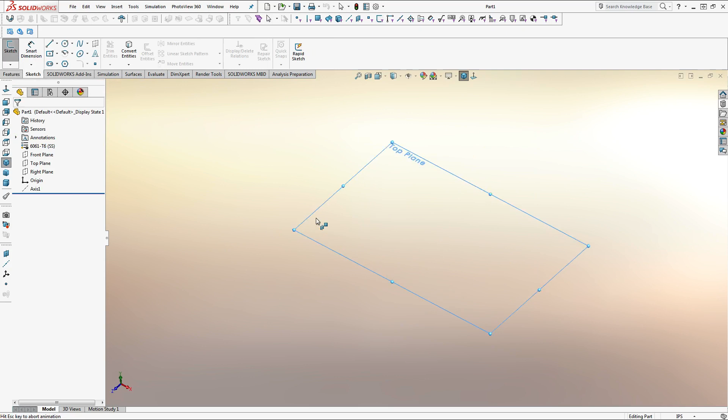So I'm going to start off by doing a layout sketch of my drivetrain. Before I even make any parts, usually I do a sketch of basically what it's going to look like, what the constraints are. My drivetrain has to fit in a 30 by 30 area, so 30 inch by 30 inch. So I usually start off by defining my area with a bounded box of construction geometry. Think of this like a top-down view, so to speak.

And then I'm going to have my 2x1 rails, it's going to be 1 inch wide. I'm going to make this center point vertical. And this can actually touch the 30-inch edge. I'm actually going to say it's going to extend the entire width. So this is my piece of 2x1 tubing, my front one. And I'm just going to real quick make my horizontal and vertical center lines so I can mirror across, just so I can be lazy. Nice. So I have my front rail, my back rail.

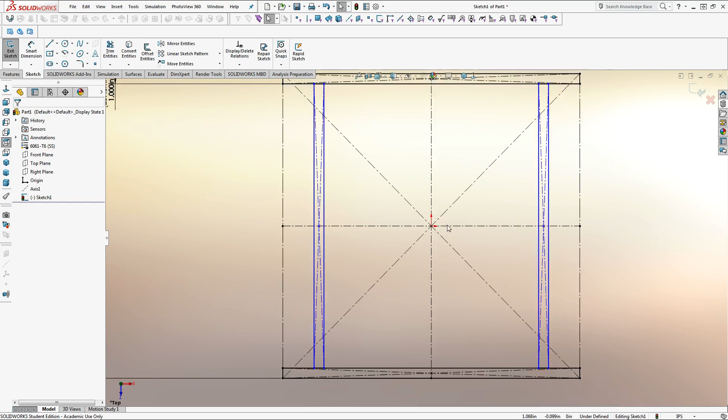Now I'm going to do my drive rails. Select that piece in there, which is the width, so I can have my 2x1 be actually 1 inch wide. I'm going to take that and mirror it across. Now how wide I want it to be really doesn't matter right now. For me, nominally, let's just say 2-inch wheel wells. I have 2 inches for my bearing block and for my wheels. We'll get into specifics about that later. I'm just gonna put that dimension up there.

So let's look at what I have space-wise. I'm planning to have my gearbox somewhere in the middle. I'm going to simulate my gearbox space by this rectangle, pretending it's a top-down view. This is the approximate rectangle bounding my gearbox. I don't know what size it's going to be, I haven't made it yet. But I know I'm going to use 2 CIMs pretty close to each other. A CIM is about 2.54 inches in diameter, so double that, 5.08. I'll round up to the nearest half inch and overestimate: about 5.5 inches wide. Typically a good estimate for the drive.

It's going to be a single speed gearbox using a single stage. So I have 2 1/4-inch plates and then a gear stage that takes roughly about 1/2 inch. So that's 1 inch, and CIMs are like 5.5 inches long. So I'm going to say this is like 6 inches long. Just a rough estimate. And of course, I don't expect y'all to know these numbers off the top of your head. But in time, you'll figure them out.

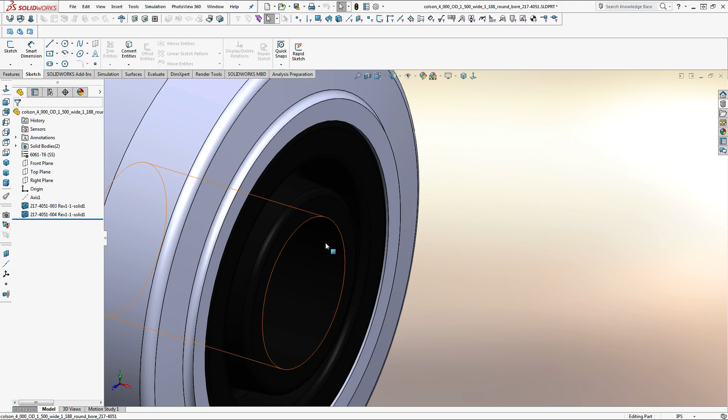Let's see. There's a round bore one, like this, and there's a hex bore. The round bore was what teams used before VEXpro came out with the hex bore ones. At this point, there's no reason not to use the hex bore one. Oh, here it is, the hex bore one. And real quickly, because it's bothering me, I'm going to change that color to something I can actually see.

When I was younger, I made everything dark black because that's how it looks in real life, and then I realized you can't actually see it in the CAD that way. So I settled with a little less color accuracy in CAD so I can see it better. So this wheel, the approximate width, it says down here 1.689. So I'll run with that.

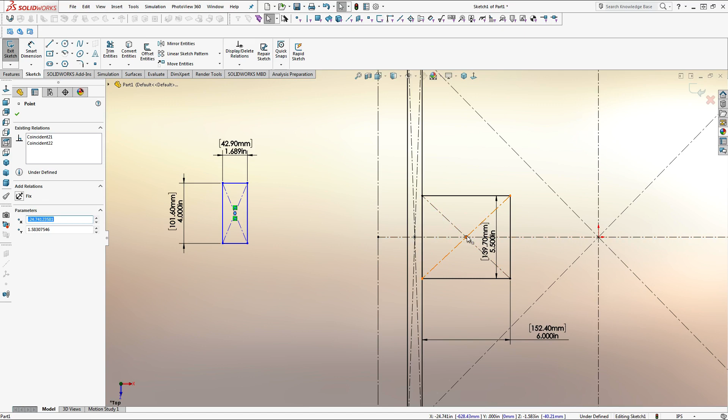And then it's going to be the same dimension as my gearbox, right down the center. Let's see. So it's not going to be directly on the tubing though, because I have that bearing block that we'll get into later. That goes to an 1/8 inch thick, and then I'm going to have a 1/16 inch spacer in there. So that's 1/8 inch plus 1/16. So yeah, I have a nice little bit of wiggle room.

What's this? A little less than like 0.25. Or is that quarter or 0.25? That's quarter. Yeah. Works for me. So I'll do that. And then I'll simulate my other two wheels. I can just use the equal relation because all my wheels are going to be the same size. And I'll say that's a vertical to that one.

Now let's see. I want my wheel to be kind of far, but not too far. I also want it to be an approximate multiple of 0.25, just because it makes certain things easier. So let's see, this is currently how far? 11.638. Can I do 11.75? Yeah. How much wiggle room does this give me?

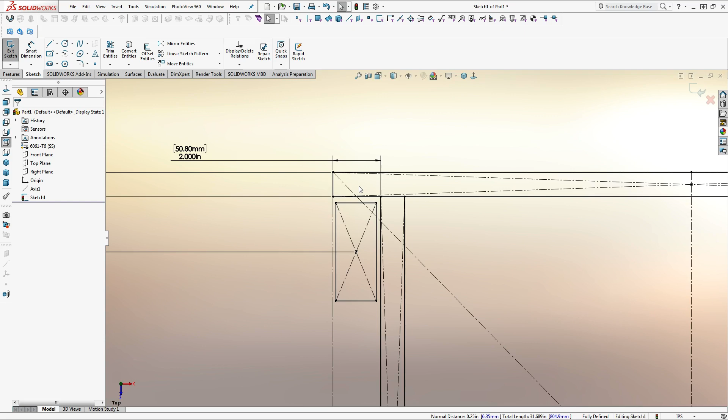Quarter. Yeah. I want to be able to move it up and down by like, oh, well, no, okay, yeah. Actually, that works. Because the bearing block is going to have 3/8 inch of total movement, which means 3/16 in each direction. So 3/16 is less than a quarter. This is nice. Okay. So I'll just put that there.

And let's see, I'll just mirror that across so I can have my wheel side, and then I'll do the same thing. Oops. I don't want to get the tube. I'll just get the wheel separately, and then I'll get the gearbox. Just real simple. Did not get that wheel. Or that one. What's up with that? Alright, I think that looks good. Just mirror that over. Nice.

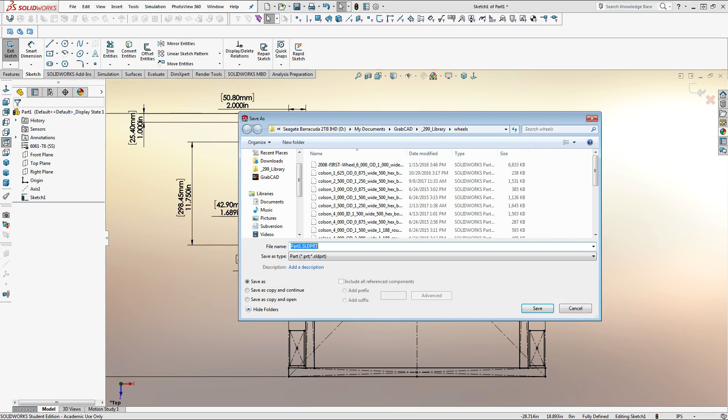So it's a pretty simple diagram of what my drivetrain is going to be like. And it's nice that we get all this done in the sketch, because we can always refer back to this for dimensions and such later. So I'm going to save this. When I go to my project folders, before I even have my different subassembly folders, I have a few underscores. I just put underscores in front because it moves the folder to the top. And I'll have like sketches or DXFs, different non-subassembly specific folders.

So this is the drivetrain, this is the main sketch. I still use the naming convention most of the time. And instead of a subassembly number, I'll put sketch and which sketch it is. Most of the time I just have a single sketch in its main. Sometimes I'll have a sketch for different subassemblies if it's a larger robot. Either way, get that saved so we can always refer to it later. We'll get started with making parts.

Looks like this is made up of 4 pieces of tube, 2 pieces of 30-inch, and 2 pieces of 28-inch. Cool. So I'm going to start with the front and back ones because they're super simple. We'll extrude on the right plane. I use, by force of habit, the right plane. You don't really have to, but I like doing so. For my front and back tubes, I'll use a 1/16 inch wall because they're not taking as much load from the drivetrain as the left and right rails are. I also use the term rail to refer to the tube. It's interchangeable.

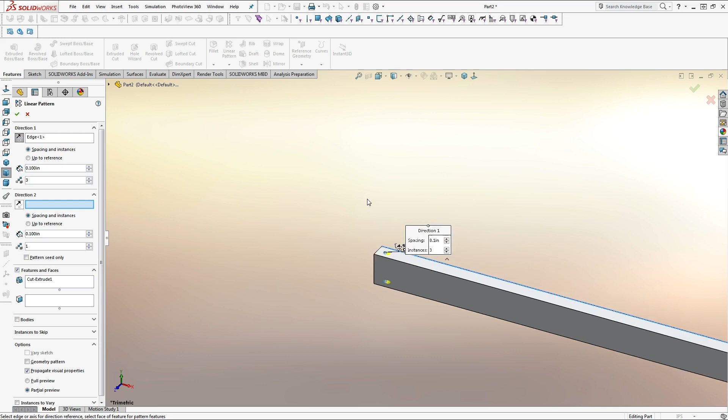Oops, don't want to fill it. Going to the features, I go to a linear pattern, select any side length, as long as it gives me the direction I want. I can tell because the arrow's out there. And over here on the side where it says spacing and instances, I'm going to actually choose up to reference. What this will allow me to do is I will select the edge, my offset distance. I just click the up arrow to 0.1, doesn't matter what it is, but 0.1's good. And I'll say my distance between instances is 0.5. The nice thing is it just does it all for me.

Now, as an alternative, what I used to do, I used to use spacing and instances, and I would count each individual instance. The problem with that though is this one's 59, but if I wanted to change this length, if I want to make it 32, I still only have 59 holes. Whereas, I'll change that back to 30.

If I do up to reference, my reference point is the end of the tube, and I'm always referencing off that position. I don't give it an exact number. I can go and say 36, why not? And you'll see it'll just fill in the extra gap for the holes. So that's an easy thing to do. It's a nice little touch. So really for this part, for the front and back, this is it. That's all I really need for this rail.

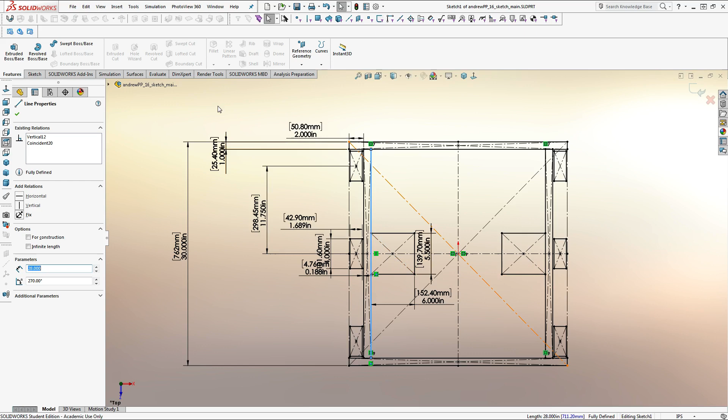So I'm going to make a new folder, and it's going to be Andrew Personal Project 16 01. Let's call it the frame. I'll save this in here as Andrew PP 16 0101. So the first part in subassembly number 1. Cool. And then what was the size again? Go back to my layout sketch. My left and right drive rails are 28 inches. Good to know.

So I'll start with doing the exact same thing for the most part. Use my center rectangle. I have a 2x1 rectangle. Use 0.125 as my offset. So what I'll suggest for all y'all is for your front and back tubes, you can make them 1/16 wall, thinner, not always as strong, but it's definitely lighter. But for the inside, where you have your drive tubes and your gearbox and your bearing blocks, you're going to want to use 1/8 inch. And I'll extrude this to be 28. And I'll do the same thing with the holes.

Extrude that out. Oh, yep, that's what I want. Linear pattern, using up to reference. Up arrow to 0.1. 0.5 spacing. Now, this is pretty much where we left off on the other tube. On this one, we're going to start adding some things in, most notably our gearbox mount and our bearing blocks. So, should I do the gearbox first? No. I'll just do this.

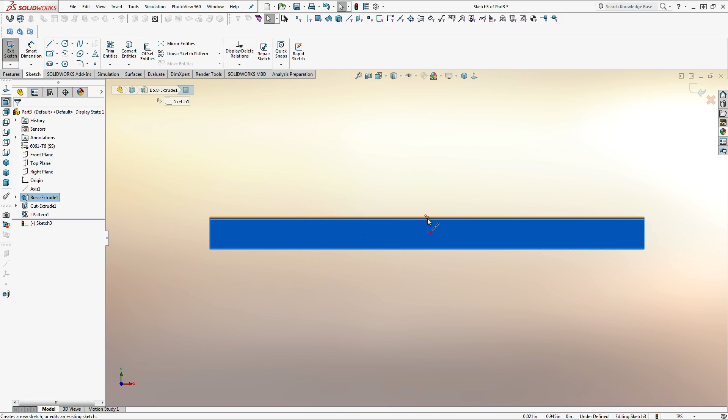Yeah. So what I usually do is I already know what my gearbox is going to look like typically before I start the tube. In this situation, you probably don't know. So just follow along. If something makes sense, great. If it doesn't make sense, just trust me on it. It will later. Cool. So here's what we're doing. I'm going to simulate what my side rail is going to look like.

Now I'm doing a 6-wheel drive drop center, which means if you look at my halfway point, the center wheel is going to be dropped by a little bit, actually that's the main point. The center wheel is going to be dropped a bit. The way I typically do it, let's say if I want an 1/8 inch drop, I'll have the center wheel lowered by a 1/16 and the outer wheels raised by a 1/16.

You can do it so the outer wheels are level and the center ones down by the whole drop. So that'd be like outer ones are at 0, centers at -1/8. It's up to you as long as you have that drop in there between the outer and inner wheels. For 6-wheel drive, typically 1/8 to 5/32 inch drops are pretty nominal. Most of the time you'll get off fine with those, especially with Colson wheels, which is what we're using.

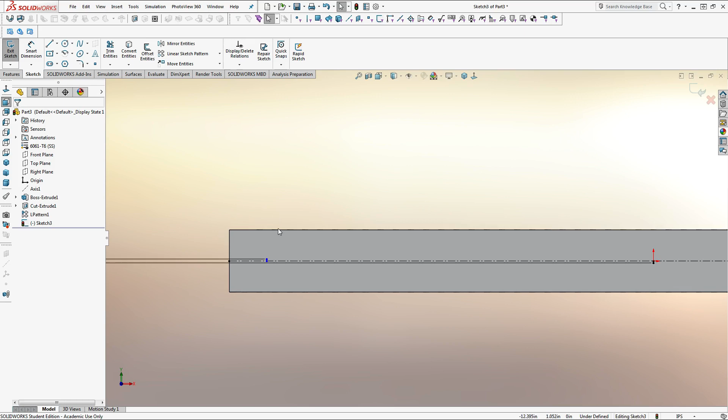So I'm going to say these two are equal, and the distance between them is 1/8 of an inch. 0.125. Cool. Now, let's see. How far apart did I say my wheels were on the sketch? 11 3/4. So I'm just going to say distance between these 2 points is 11 3/4. So I have my position for my 2 wheels, or for my 3 wheels.

I'm just going to model my wheels from the side profile. It's a circle, and it's a 4-inch wheel. That looks good. Do the same thing over there. I'm not going to deal with the other side because I'm just going to do this one and mirror it on over. The center is different from the sides, but the 2 sides are just mirrors of each other, so that's fine.

Starting off with the wheel side, the gearbox side bearing block is a 1.5 inch hole with a mount that is 15/16 off its side. So it's 15/16 off center, or a total distance, if you do midpoint line like I just did, of 1.875. If you want to measure that, it's 0.938 or it's 0.9375, just being rounded in SolidWorks, and that's fractionally 15/16. And that's going to have a number 10 through hole, which is 0.196.

And then the other set of holes for the gearbox mounting is going to go here as well. And that's going to be 4.5 inches. Now, why 4.5 inches and why 1.875? It's because I told you to. For right now, it's all that really matters.

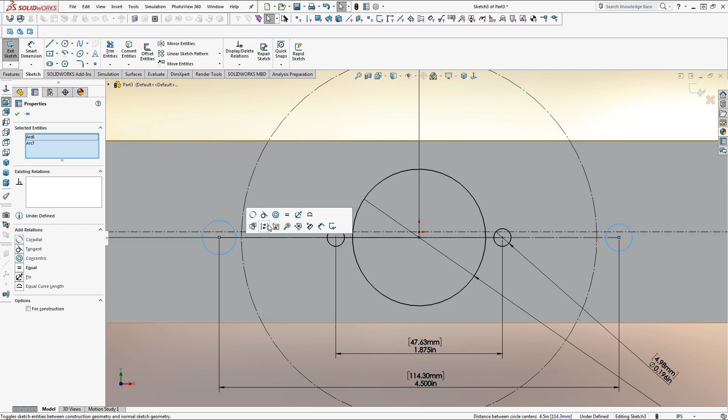Nice. Now for the wheel side, we need to put a bearing block in. And we're going to model that as a rectangle, which nominally is 1 3/8 tall and 1 7/8 long. But just for tolerancing purposes, I'm going to add 2 thou to each of those. So instead of being 1.875, it's going to be 1.877. Instead of 1.375, it's going to be 1.377.

It's pretty fair. Now, a few ways to do the slots, because your bearing block slides in your slots. Typically, the way I've always done it is I do a slot on both sides, because that's technically what it is. Set them equal. Whoops. Use the equal slot. Make them 3/8 long. The radius is 0.196 over 2 because it's a radius. You're using number 10 bolts. And that's usually how I would do it.

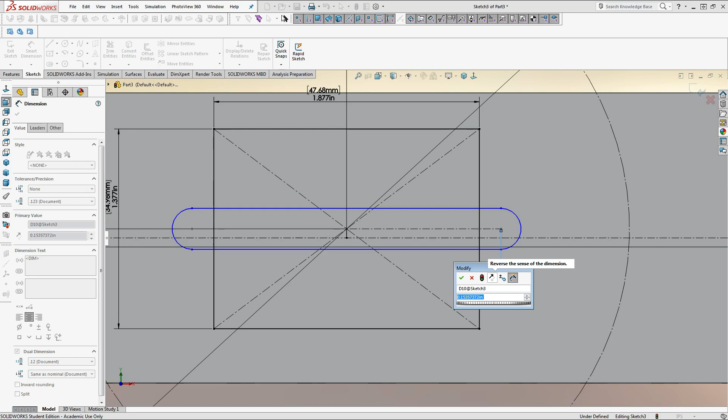That being said, one of my students earlier introduced me to a much simpler method, which is just as viable to use. I personally don't, just because I'm stuck in my ways, but this is a good one too. You just make one large one. It's all getting cut out anyways. Make the distance between the center of one end and the edge to be half of your travel distance. Instead of 3/8, you have 3/16. And do the same thing with the radius, 0.196/2. Works just as well. Now that's your bearing block hole, or the slot at least.

However, you need your tensioning slot or your tensioning hole. You can have your cam tensioner in there. That's just a number 10 hole. Make it horizontal with the center of your bearing block. And you want to make a dimension between the center of the bearing block and the hole to be 1.875. It's a number that keeps coming up. It's a pretty good number.

So I'm going to take that. I'm going to mirror all this across that little AB line right there. Get the same thing on either side. I'll go to cut extrude now. And I'm going to cut it all out. Through all, and that works nicely.

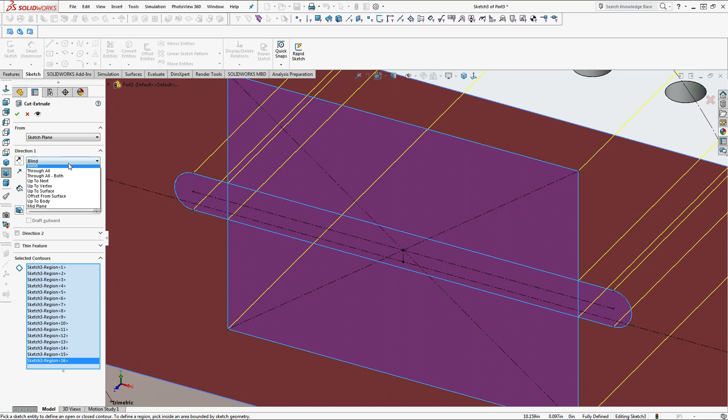I'm going to fillet these inside corners to about 1/4 inch. I'm going to use the fillet expert to select most of them all at the same time. However, where is it? Yeah, I usually will select all concave and just deselect the inside of the tube, because otherwise it selects these corners in there. I think I actually selected the tube wall. Yeah, let me deselect that. Oh, did I get it? And I got the tube wall again.

It's pretty easy to weigh. If you see the cursor and you see that little rectangle next to it, it means you're selecting a face. And if I can get it right, oh, see the little line, it means you're selecting a line. There it goes. Oh, perfect. So now I should have only those selected.

Perfect. And I just realized I did not select the right hole over here. So I'm just gonna go back to my cut extrude and select that. Yep, did not get that for the tension block. Cool. Yeah, so this is our standard drive rail. If you want to go a little lighter, you can pocket the inside area, this chunk of meat right here. Usually what I used to do. But that's not important. I'll save the part and get into an assembly. Now, let's see.

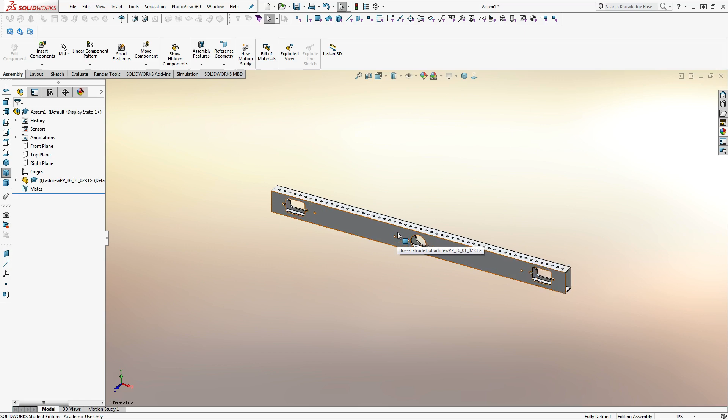Start off with a drive tube, just because that's how I want to orient it. However, when I first put a part in, it fixes the part and it matches the part axes with the assembly axes. So, if I go to my part now, I can go to my front plane. It's the same front plane as the assembly. Top plane, same as top plane, yada yada. And I don't want that, because that makes my job, well, not harder, but I don't get to be lazy as much, and there's no fun in that.

So I'm going to float the part, drag it out a little. My front plane is the one parallel with it, so I'm just going to mirror it across the front plane. I'll make another one. My top plane, I'm going to make that the bottom of it. And what I will actually do is I will use the right plane for the right plane, just so I can have it centered. Cool. So that looks good to me.

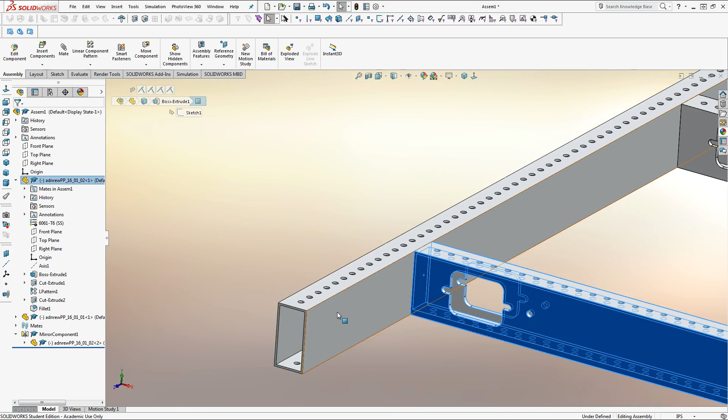And then I'll insert my sides, my front and back. I'm going to make this just by going the top's coincident with the top, the end's coincident with the ends, and then there's a 2-inch distance between that face and that face. And there's a 2-inch distance between these two faces. And if I do it right, I shouldn't be able to move anything because it is all fully defined. Fantastic.

Sorry, long night. I'm going to mirror the front tube across the right plane. And that's the basic shape of my drivetrain. So I'm going to save the assembly. 01 frame. Of course, there's still a little bit of stuff to do, but I'll save that for a little bit later.

For now, I'm going to start adding in my bearing blocks from my West Coast Drive section of the library. If you look at a bearing block, you have a thicker section and a thinner section. Thinner section goes on the outside, thicker section goes on the inside. It's kind of weird to figure out how to mate them. Good way I've always done it, my favorite, is using the width mate. If you go to the advanced mate section, use width. You can center something along two different faces.

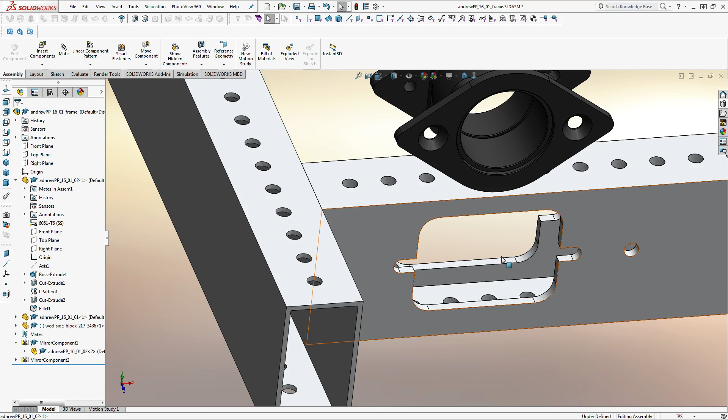So I'll select the two side faces of the bearing block and the two side faces of the slot. And so I'm just going to center it in the slot. And I'm just going to put this face of the block coincident here. And I'll make them do the same width mate with the vertical, just because the top bottom width right there is 1.375, but my slot, I modeled it to 1.377. Perfect. So it gives a nice little wiggle room.

Now if I were to measure the distance between these, it should be 1.313, some strange number. I can just get flathead bolts that are 1.375. If I go to my bolts in the library, number 10, flathead cap screw, somewhere around here is 1.375. There it is. Sometimes parts, when you introduce them to assembly, will show a sketch in them, which always annoys me. I just disable sketches from the view tab.

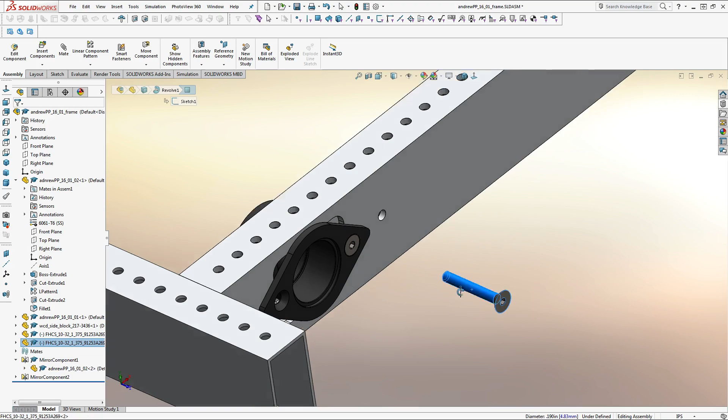So I'll put these in, make them coincident and whatnot. It's just nice to model all your hardware in there. You don't need to do it, but it's good practice, especially when you start indexing assemblies and such. You have every part in there. So for this, I'm going to use Thunder Hex bearings, just because they're nice to use. No reason why not to. Oops. Bearing is all the way at the top, and Thunder Hex is always all the way at the bottom. Use flange bearings because those are the ones that sit nicely in this little area.

So in this area, the round part of the bearing sits in it. Whoops, let me drag that out. This little recess right here, you put the flange coincident in there, and it sits nicely in there. Take out another one, make that concentric, and put it in. So that's pretty good. And since I might as well, I'll just put my wheel and my spacer in there.

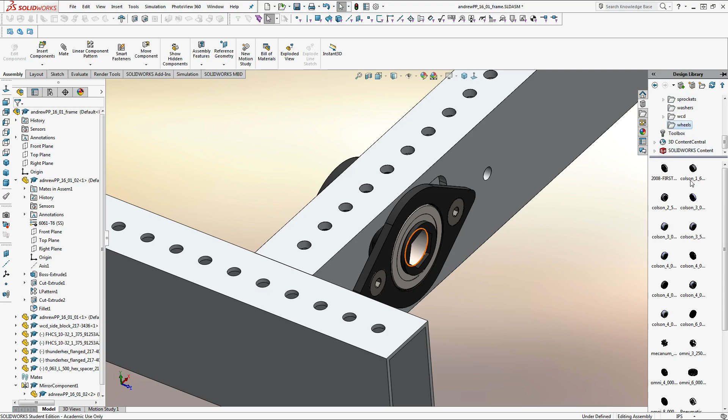I said I have a 16th inch spacer, 500 hex. 500 is 1/2, and 375 is 3/8. So I'll just make the round of this concentric with the round of that. Oh, we drag it out. And make those two faces coincident. Now if I go to my wheels, Colson, 4x1.5. Nice.

So I'm gonna use this little round surface right there to mate to the round. I usually try to avoid mating the hexes directly because not all the hex models are the same. What I'll do instead is I'll make the round coincident with the round. I'll take a face of each hex and I'll make them parallel, so that if you look in here, oh, whoopsie-daisy.

If you look at this face and that face and that face, they are now lined up. I don't think my color change worked either. It definitely looks like black here. Yeah, let's change that in there. Cool.

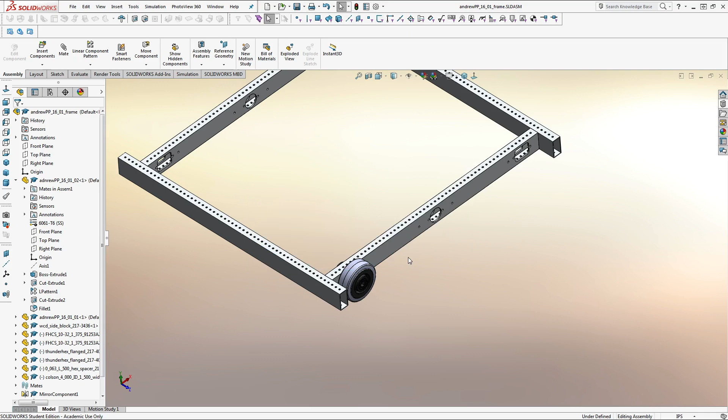And then I'll take this face, it's the inside face of the wheel, and make it coincident with the spacer. Nice. And it looks like we have a good amount of room. Cool. So I'll save that. And then, actually, no reason not to mirror the wheel and the bearing setup across. So I'm going to go back to my mirror. Actually, I should slow that down a little.

Sorry. I'm going to go back to the first mirror component I made. I'm going to right click and edit the feature. I'm going to select the wheel, the spacer, the bearing block, the 2 bolts and the other bearing. And that'll add them to the other side as well. And when I go to the second mirror component, I'm going to do the same thing, except this time I'm going to choose both sides.

So I have my right side and my left side. The one I'm going to mirror to the side I mirrored. Usually it's a good idea to keep your mirroring constant, whatever side you're on. So, for example, this left side over here is mirrored, which means this is my constant. This is the side I should keep working on. I should add everything here. So when I eventually add a shaft and sprockets and such, I'll add them all to this one and then add the mirrors across. So far, so good.

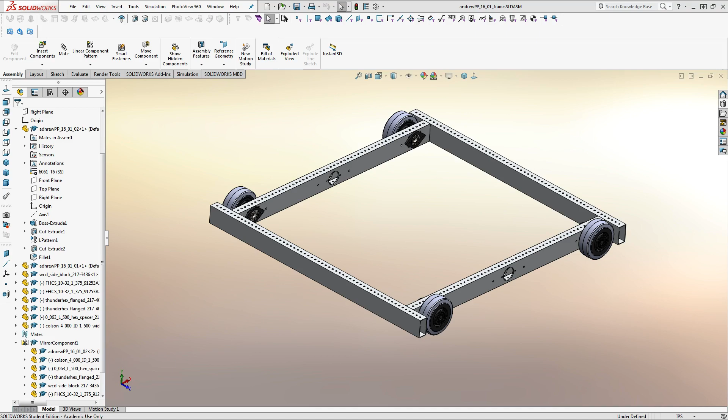Now it's time to make my gearbox. So the first thing I'd want to do is open up JVN's Design Calc. I'm just going to bring that over here, and hopefully you can see it.

If you can't, that'll be embarrassing, but we'll work through it. I'll just verbally explain everything, because I'm apparently good at that. I'm not. I'm really not.

Anyways, I'll go to my custom 1-speed drive tab, because it's a single speed. Change my motor to a CIM motor, gearboxes in drivetrain 2, because we have one on either side. Motors per gearbox I'm going to put down to 2. Total robot weight is 154 pounds. Well, you get that right.

This is a theoretical max of 120 pound robot, plus 20 pounds of bumpers, which is 140, and 20 pounds is usually the max bumper weight. And then you have our 14 pound battery. And batteries and bumpers aren't included in the 120 pounds. So that's approximately a 154 pound robot. I'm going to say all the weight's on the driven wheels. Don't worry about speed loss constant and drivetrain efficiency. You'll know when to mess with those at a later point. Wheel diameter, this is a 4-inch wheel.

Alright. Since it's single speed, I'll shoot for like 15 feet a second. It's not bad. So my driving gear is going to be the pinion on my CIM motor, sorry. That's going to be either 11, 12, 13, or 14. My driven gear is what's going to be on my wheel end. 54 is too small. 11 to 60. So let's see. 4-inch diameter wheel. Real quickly. I think I can fit a 64 tooth, no problem. 15.99, that's close enough. Yeah, it's 16 feet per second, that's fine. 11 to 64, yeah, that'll work.

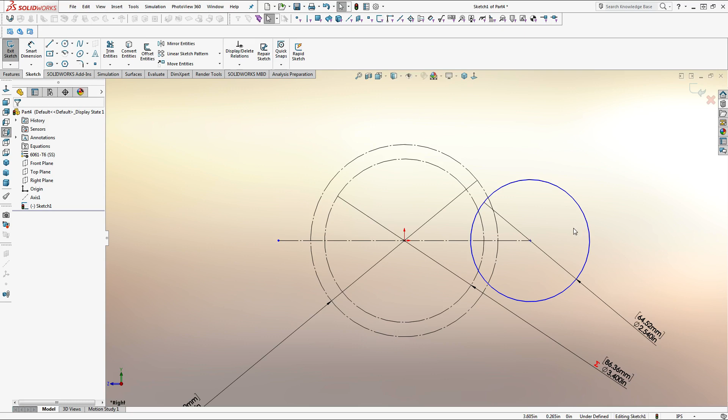So this is a 66 tooth gear, so my outer diameter is the tooth count plus 2 divided by diametrical pitch, which is 20. So that'll work out nicely. I'm going to make that construction geometry as well. I'll make a line going up. Actually, not even going up, no, I'm sorry. This is a single stage. So what I'm going to end up doing is I'm just going to put my motors off to the side. Now a CIM is 2.54 inches in diameter. Coincidentally, it's a pretty good number. I'll make a real quick center line. I'm just going to do one side and mirror it over.

Now I have an 11 tooth pinion on the CIM, but to note, with the 11, 12, 13, and 14 teeth gears, the 11 and 13 teeth gears are addendum and dedendum modified. Don't need to worry about the fancy terminology. All that means is the 11 tooth gear is the same size as the 12 tooth gear, and treat it as a 12 tooth gear when you're doing your sizing math. The 13 tooth gear is the same size as the 14 tooth gear. It's treated as a 14 tooth gear. So even though we're using an 11 tooth pinion, I'm going to say my outer diameter is equal to 12 plus 2 divided by 20, so it'd be 0.7.

And the distance between the centers, even though I used a midpoint line, is going to be equal to the sum of my two teeth. So even though it is an 11 tooth gear, I'm going to say 12 plus 66, divided by twice the diametral pitch, so divided by 2 times 20, or just divided by 40, and then I'm going to add 2 thousandths to the distance to account for machining tolerances and make sure the gears aren't too close together. That's why I added the double parenthesis there in the beginning. In the previous one, I just did a single one. So I do double parenthesis open, then I close one, close the other, and then add 0.002.

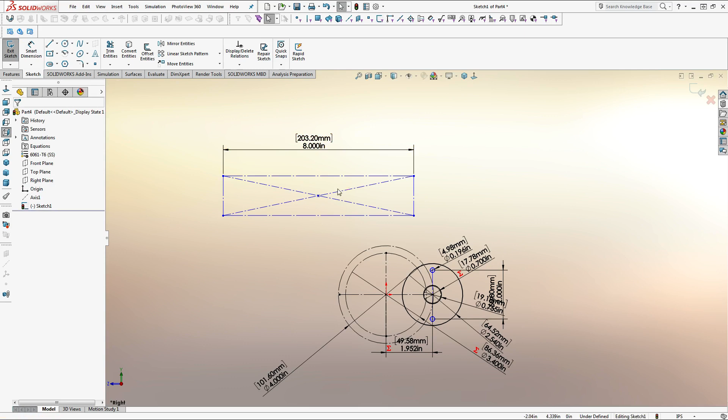So this is going along my drive tube. I'm not going to model the full 30 inches, but I'll say 8 by 2. So this is my drive tube, and this is all centered. But it's a 1/16 of an inch below center, so 0.0625. So this is what it's going to look like relative to the tube. I want to use one of these holes to mount the gearbox. Oh, not what I wanted. So I'm just going to real quickly, yeah, that works.

Actually, I'm going to change my mind a bunch of times while I'm doing this. I had a plan, and then I realized I'm going to scrap the plan, and now looking back at it, I think I'm going to go back with the original plan. So I apologize for the inconvenience, but I promise you're going to learn more because of this. I'm going to move my motor up there.

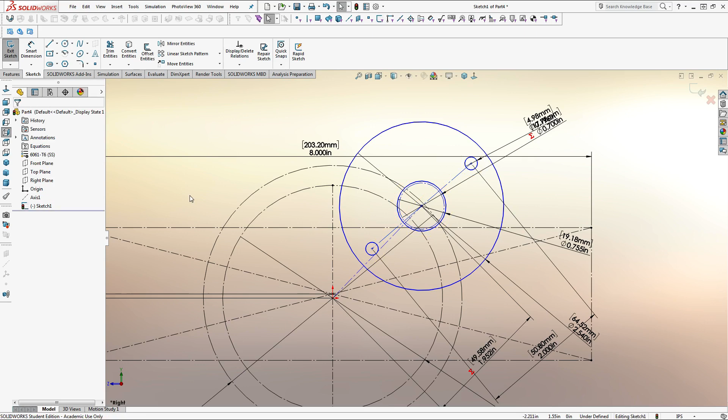I set these two lines equal because that's the distance between my two motors. So I've been working with 3-inch wheels for the past few days, so I forgot I could literally just put my motors up here. Whoopsie daisy. I didn't like that. Cool. I'm just going to delete that and then mirror it across, because I forgot mirroring's a thing. Oh, not offset. Remember, kids, don't CAD while tired.

Nice. So this is my two CIM motors. I'm gonna put very little room between them. I'm gonna put like 20 thousandths, so it's like 0.020.

All right, cool. Yeah, if you got to go, I'll post the rest of the recording later.

So I'm going to put the line for my CIM motors and make that perpendicular, just so it makes sure it's equidistant. And then my bearing is 1 1/8 inch outer diameter, so 1.125.

See, what time is it? Oh, okay, I've been doing this for a while. Time flies when you're doing CAD. I wish.

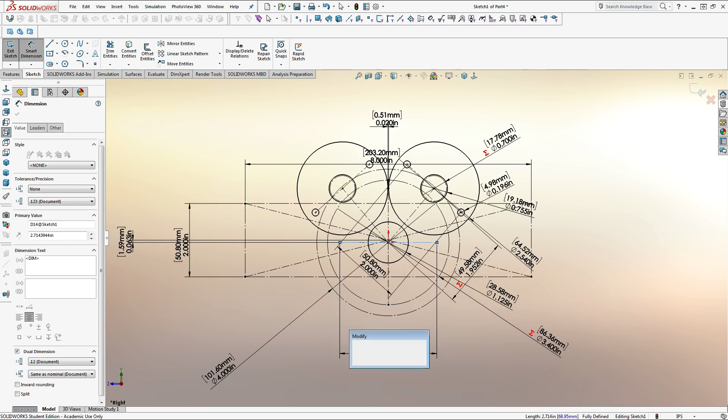So I'm gonna have my bearing block holes, which are, you know, the 1.875. And I'll have my other mounting holes, which are the 4.5. Actually, hold up, sorry. These holes are going to be 0.15, because we're going to thread them 10-32. So we'll do that. This is going to be 1.96, and I'll mirror that over.

Now we're going to put an outer hole here. So this is actually not a hole, it's just extra material, and we'll call it 1 inch. So we're going to have a big pocketed boss, and you'll see how that works out in just a bit. So it looks like with this, all being said and done, we have the main part of our gearbox. What we're going to end up doing is we're going to connect the outer layers, connect the two CIMs across. Could totally be mirroring this, but nah, a little bit of overlap there.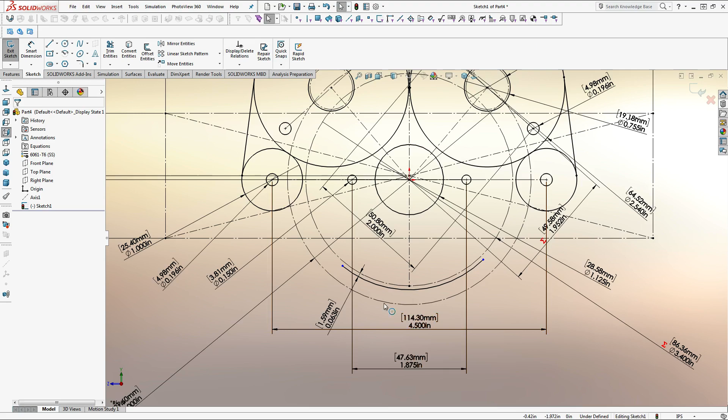Interesting. Now for the bottom, I could just have some clearance there and call it a day. What I want to do is make it so that my gear doesn't touch the ground if I can avoid it. Sometimes I don't do this, but ideally you could just create a little bit of an arc beneath there and have like 1/16 of an inch between the outside of your tooth and your plate, just to make sure if there is any skidding, it's this plate that's skidding and not the teeth. You don't want to be loading your gear teeth like that.

So I'm going to take this and attach them to both ends and make them tangent. Cool. So now I have the basic outline of my drivetrain gearbox. So easiest thing to do from here is I can go extrude the plate. Gotta make sure I get that little area in there. Nice. These plates are typically 1/4 inch thick. So that looks good. This is the plate.

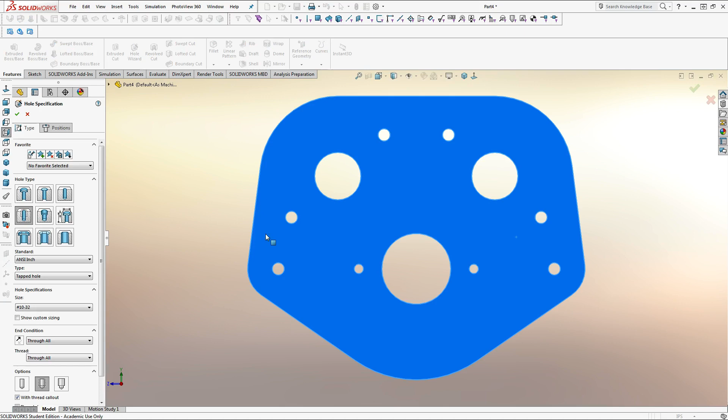First thing, I'm going to go to my features. I'm going to use my hole wizard to tap these two holes. The reason I made them 0.15 is because the threaded hole for number 10 is 0.159. But if I were to dimension it as 0.159 in the sketch, it would say you can't cut through here because you don't have material to cut through. Technically the hole's already there, so it wouldn't let you do it. So I just go to 0.15 and then use the hole wizard to make it go to 0.159.

Now on the outsides with these two holes, remember those 1 inchers we put? We do that because there's a counterbore for some 3/4 inch tubes. It helps make the gearbox a lot stiffer in West Coast Drive gearboxes. So they're about 3/4 inch diameter, 0.75. For a clearance hole, just add some room in there. We'll make them 0.755, add 5 thou. And we're going to cut extrude, not all the way through, just halfway, so we'll cut 1/8 inch in, and that'll be pretty good. That's our gearbox plate. We can pocket it, but we can do that later.

So I'll make a new subassembly for my drivetrain. I'm going to say gearbox.

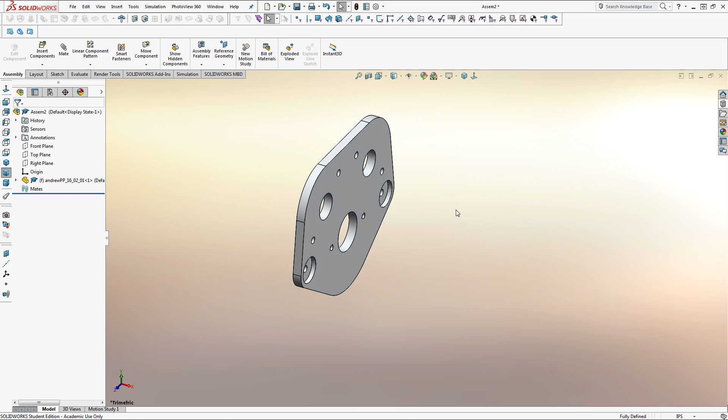It's going to be 0201. Nice. So we'll make a new assembly with 0201. I'll draw out another one, and I'm not sure if I mentioned this earlier, but you probably saw me, when I was doing assemblies, just drag out another part. The way I do that is if you hold Control and you click on a part, you can pull out another one. Makes it super convenient.

So I turn this around so that the inside counterbores are facing each other. I'm just going to make these concentric, so the two plates are equal, just at some mysterious distance apart. Right. Cool. And what I'm going to do is, on the rear, I'm going to put my bearings and my motors in. I'm going to use a hex or a thunder hex shaft to go all the way out.

Because I'm going to have my bearing block out here, and that bearing block's going to have a thunder hex bearing in it. But at the very end, I really don't need anything special, so to speak. So I'm just going to do a 1/2 inch round bearing, so 500 flanged. I'll make that concentric. I'm going to put the flange on the outside because there's no point in putting it on the inside.

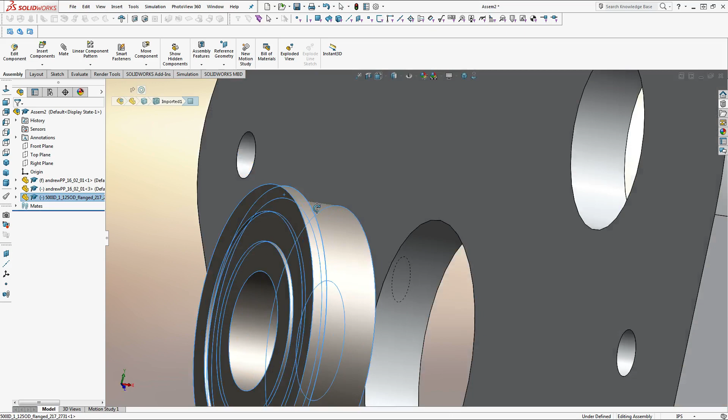I would put a flange on the inside if I could geometrically retain it, and what that means is if I have a flange on the inside of this plate and a flange on the inside of this plate, you have a shaft in between, and something pushing against the flanges to prevent the bearing from popping out, you can geometrically retain it, which is really ideal if you can. A bunch of other gearboxes will do that, but we can't do it on this one, so there's no point.

And let me just check my gears. Actually, while I have the bearing tab open, I'm just going to drag out my thunder hex bearing. I'm just going to leave it there. Okay, so you see it disappeared. Sometimes SolidWorks does this thing where, if you see it, it's in my feature tab, it's just not where I put it. It'll automate something. So it tried to automate it to the other bearing. It's like, oh, you have a round thing that looks exactly like the other round thing, so clearly you must want it right next to the other round thing. And it's no, SolidWorks, it's not what I want.

But can't be mad at SolidWorks for too long. You can, but it's not healthy. It's just a CAD program.

It's dumb. I'm going to go to my gears tab and go to my 20 DP gears. I'm going to hex 500, just 1/2 inch hex bore gears. Let's see, do I have a 66 tooth gear? I do not. Oh, today's your lucky day. So VexPro now carries every tooth size from 14 to 84. That's even. So 14, 16, 18, 20, 22, 24, all the way up to 84. So that's why I use 66, because it's just 2 above 64.

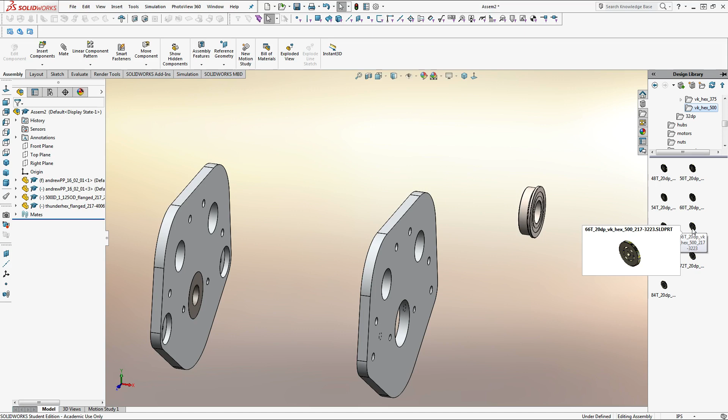Oh, there's VersaKeys in it. Does it matter? Doesn't matter to me. Is there no regular 66 tooth? Wait, if it's VersaKey, do I actually have it? I may actually have this downloaded. That would be in VK hex. VK stands for VersaKey. I do have it. How interesting. Alright, well, it's not your lucky day, I guess. I won't teach you. Actually, I will. Because I just did it.

So you download the zip file, drag it to a desktop, go back to SolidWorks and go to your desktop, open up the part. There's a few things you're going to notice. Number one, the color's off. Most importantly, the color's off, which sucks. We auto-assign the material as 6061. It's not actually 6061, it's 7075, but it really doesn't matter for this case. We don't need to change it.

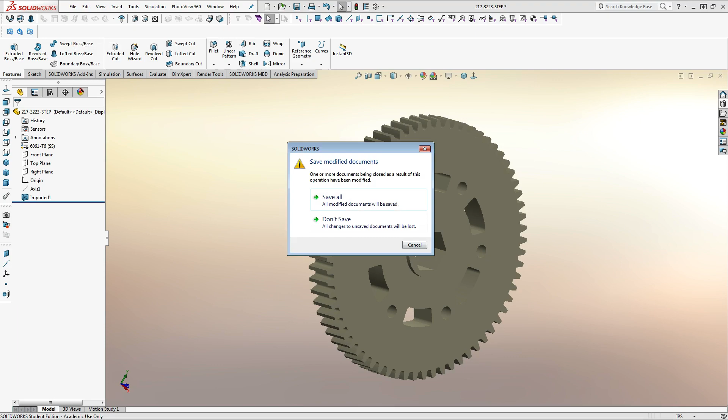What we'll end up doing is we'd save it under a file name that matches everything else. However, the most important thing, I go to a pre-existing gear, copy appearance, go to the new one, paste appearance over the entire part, because appearance is important. I'm not going to save this because I actually have the part right here. Anywho, let's make that there, concentric over here, and then coincident at this face.

And really, that's it. So I'm just gonna put my bearing block in. It's a single reduction gearbox. That's all I really need. You can experiment with, instead of doing 11 to 66, you can do like 12 to 44, and then 14 to 34. Up to you. You can make a 2-stage if you want. It's definitely not bad practice. For now, I'm just gonna do single stage because why do more than you need to do, right?

And we get my WCD bearing block for the gearbox side. I'm gonna mate this by these two holes, the ones that are exactly 1 and 0.875 apart.

And then this is the interesting part. I distance this front face to this back face by using a distance mate of 1 inch, because that's the inch that my tube is. The reason I don't just make things coincident is because of this little, if I go to the side, this little bit right here. See, I don't want to make this face coincident with that face. And the reason is it's purposefully made a little short, so when you screw it in right, it squeezes the tube a little. Just to make sure you grab hold of it tight.

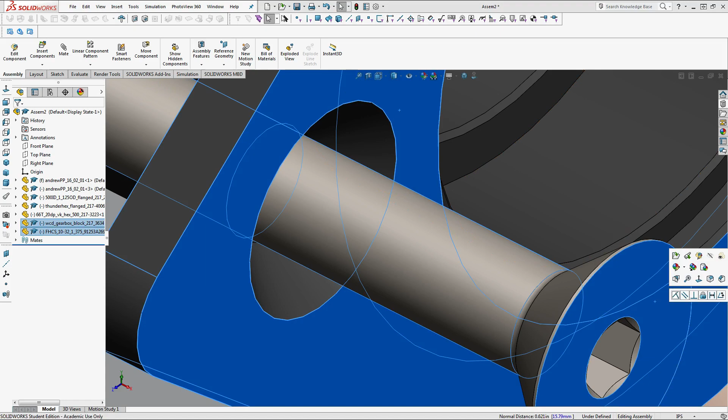And distance between that face and this face, 1.375. So I'm going to put in my bolts. Number 10, flathead cap screw. 1.375. Turn off sketches because they annoy me. And let's put that in. And then flathead is just coincident with the surface. And that looks good to me. And when I eventually mirror things over, I'll just mirror that over.

So I'll take my bearing and I'll put that in here. Put the flange in there as well. And then, let me see, what's the distance from here to here? 1.063. Works for me. So I'm going to get a normal, actually, yeah, I'll make a custom spacer.

What I was going to do is go over, Vex Pro sells these spacers. I can go over here and go 500X, and they're in like 16th, 8th, quarter, half, 1 inch and 2 inch lengths. I was going to put a 1 inch in there and then a 16th inch in there and call it a day. But since we're doing Thunder Hex, I figured we might as well show you how to make a Thunder Hex spacer, because you can use regular hex spacers for that, but if you want to do a custom spacer, it's actually really easy for Thunder Hex.

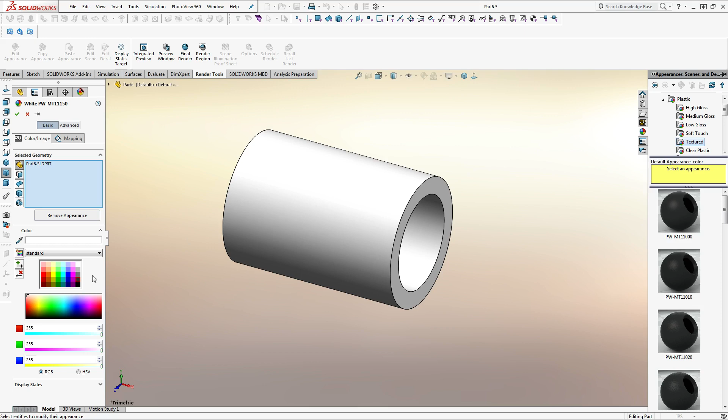So when we do that, I'll change the material to ABS just because it's close enough to Delrin. And I'm sure there's a Delrin material in there, but it's not on my favorites, so I'm too lazy to add it in. And from there, I could be good to go, but no, the white's not right. Let's remember that. It's rules to live by. So we'll go to appearance, and we'll change this to the second darkest black, just so it works. And that actually will be the color of the Delrin we're using, so it works out nicely.

Go back to my GrabCAD, user projects, test WCD, gearbox. Instead of retyping in the name, I just click on the latest file, go in there and change the 1 to a 2. Super easy. I'll set this concentric with that. Whoops. Let's see, I want this face to be right on the bearing inside race. Cool. So that looks pretty even there. And I'll make that coincident with that. And that's a really tiny gearbox, but it works.

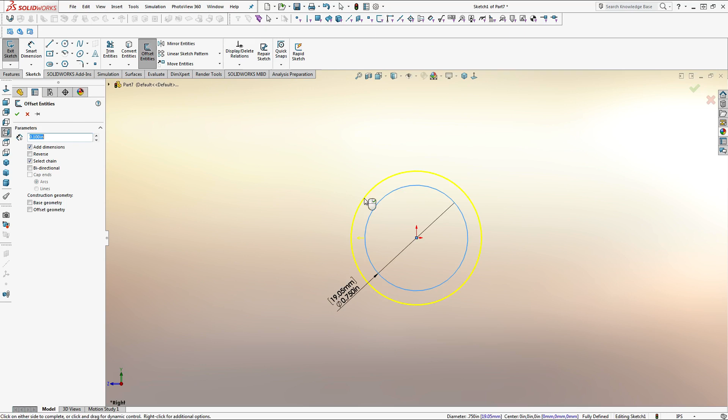So I'll get my spacers in, my big one, 0.748 inches. So I'm going to extrude that. It's just 0.75 inch diameter tube, 16th inch wall. I believe I said 748. So I'll save that as another part.

Now, in actuality, this is not the best practice. I totally don't need my second plate. These two plates close together serve no purpose. I could have one plate and bolt it directly to the tube, because it's a single stage, right? I'm doing it this way so I can teach you good practice with multiple stages, and when we eventually do shifting, it'll look like this as well.

So I'm going to take that surface, make it coincident, take that one, make it concentric, boom. I know I have clearance because my sketch showed it, because I used the outer diameter. Then I'm going to put a nut on this end. I should have a nut there. It's going to be a 10-32 lock nut. It's going to go on that face to that face.

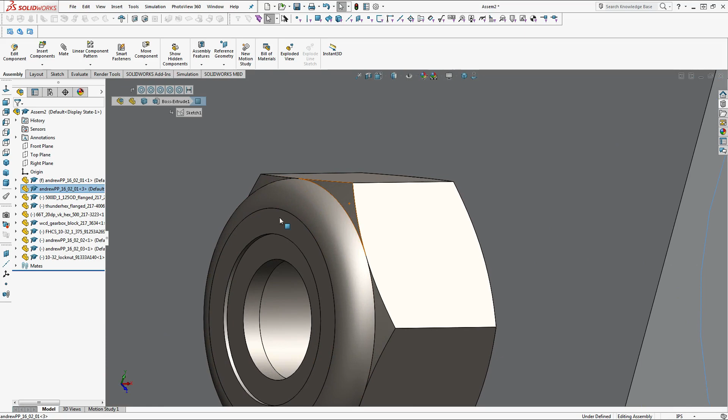Oh. Well, let's see. My bolt's going to go from a little further than here, so I'm actually going to be coincident with the face, and I'll show why in a moment, to, let's say, here, 1.223. So if I were to add an 1/8 inch, that's approximately 1 3/8. So I'll go to bolts. I could use a button head, but I'll just use socket head cap screws. I need a 1.375.

Do I not have that? I have 1.25 and 1.5. That's weird. Probably exists, I just don't have it. I got a button head because I know it exists there. It does not. Does it really not? No way. Alright, we can go on an adventure to McMaster. There's no way this bolt doesn't exist. Thread size 10-32. Length 1 1/4. Yeah, 1 3/8. What the hell? Alloy socket. Oops. Yeah, why do I not have that?

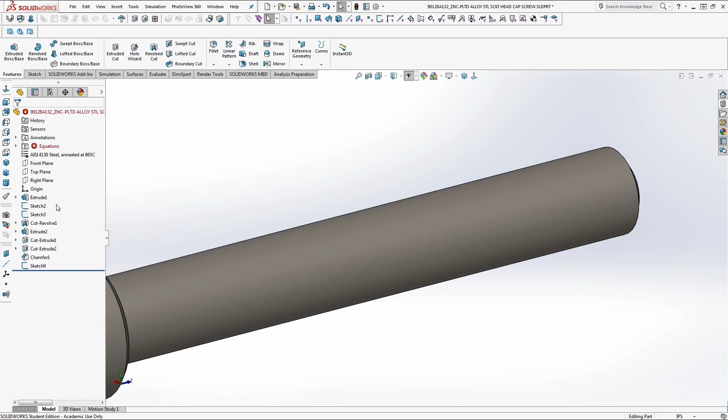So I guess that was a good lesson for you all around. Valuable information. Download the CAD. Change the material to steel. I'm going to delete the threads because I don't need them. They make my life annoying. So I just delete the helix spiral. I can delete the sketch too. Go to the equations because I broke some equations because I deleted things that the equations were a part of. It's alright. Let's just click on it, click delete, call it a day.

Go file, save as, 299 library, bolt, number 10, socket head cap screw. I'm just going to delete all this last part except for the part number, which is the 90128, whatever. And I'll put the naming convention in front, SHCS, socket head cap screw, underscore 10-32, underscore 1, underscore 375, which is 1 3/8, underscore, and then part number. Perfect. Older version file, save as. Nice.

So if I go to library now, I don't know if it'll have actually updated. I may just need to pull the part out manually. Oh, there it is. Nice. So that'll be concentric in there. I'm going to move a distance mate between here and here and make it 1/8 of an inch. And the reason is because that's going to be my tube wall thickness. But that looks good to me. Okay.

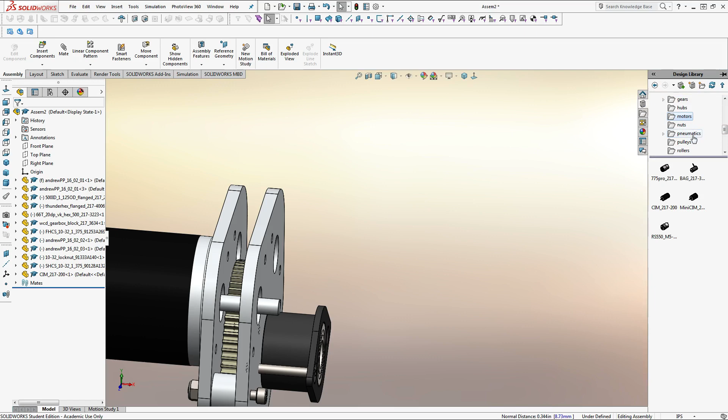I'll add my motors in now. Where are they? Motors. I have a CIM motor. I'm just going to make this coincident to this hole. And that hole concentric to that hole. Make these two faces coincident. Nice. And then I'll just go back to my gears. 20DP, CIM pinions, 11 tooth. I want to use the default configuration.

Make that concentric with the shaft. And that's pretty much exactly where I want it. Can I go here? That's going into the motor itself. Can I go here? It's going outside the plate. That's annoying. So yeah, I'll use an advanced width mate with the plates. I'll put it literally in the middle of the two plates. Because, why not? It's good enough. If I were to go to a section view,

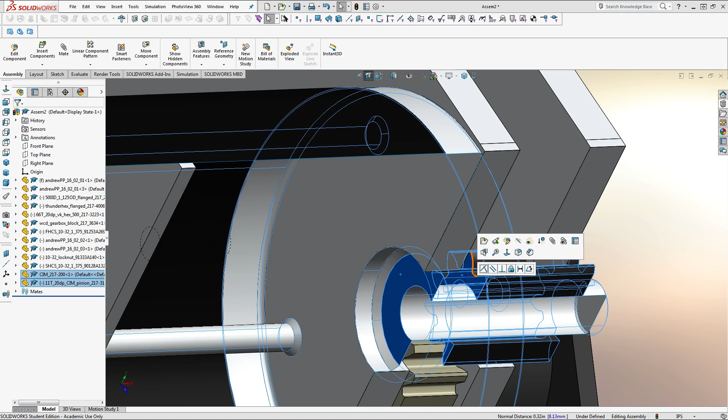oh shoot, I can't do that. It's actually inside the CIM itself. So this little area right here is the CIM. It's going inside. So I can't do that. That's annoying. I'll just delete the width mate. Alright, what I'll do is just make it some distance from there. I'll make it like a 16th. Alright, at least it doesn't exit the plates, which is what I'm trying to avoid, so that's fine.

And now I'll finally go to my front plane, and I'll mirror it across. Select the motor, select the pinion, select the bolt, select the tube, select this, select that bolt. I think that's everything. Nice. Yeah, it's good. I could put in the bolts for the motors. Not a bad idea. Actually, a pretty great idea.

Usually you want to go into the motors by like 1/4 inch. So these are 1/4 inch plates. 1/4 and 1/4 is half. Put that in there. Put the face up there. Oh, I'm going to do the face first on this one because it's so far back.

I'll go back to my mirror and I'll add those in. Nice. So really, on my front plate, if I wanted to get fancy, I could cut out most of this because these holes don't do anything, those holes don't do anything. Yeah, I could cut out almost all of that, but I'm not gonna.

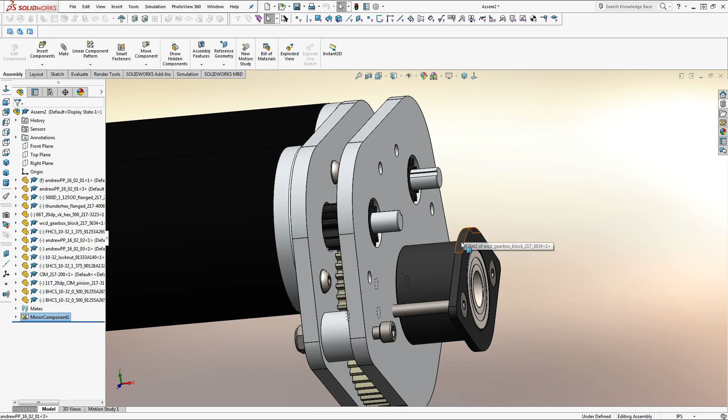Actually, what I should do is put a spacer. Yeah, I'm gonna do that. Whoopsie daisy. Teaching you good practice, so you're welcome. Find the distance between here and here: 0.498. Put a spacer in there, 0.196 inner diameter and 0.3125 outer diameter. Typically I do 0.375, but because this is so small, I can get away with this. Midplane, 0.498.

GrabCAD, Andrew, test WCD, gearbox, blah, blah, blah. Go back to assembly 2. Where did that go? It's here. Just double, triple check. Yeah, that clears the CIM by a lot. This is approximately 1, so I want 1 1/4. Button head cap screw, and I know that one exists. There.

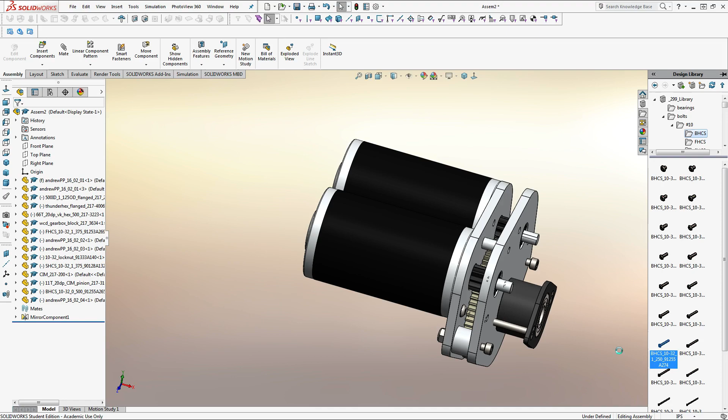So this will go into the CIM, but it'll also work as a spacer for the gearbox, adding some rigidity in there. Don't need it, but when you get to the bigger ones, it'll count. So I'll save this. 1602 gearbox.

So I got my frame. I'm actually going to have to open a new assembly now. I'll put the frame in there. And I'll put my gearbox in there. I'm not done with my gearbox yet, but I'm just going to start placing it. So I'm going to put this hole there. Whoops, back up there, bud. And this one through here.

So I'll make this face coincident there. You'll see, oh, you won't see it, but yeah, so the bolts go inside there, and they're actually completely perfect. They're coincident with the face. And you're probably wondering, how do you get the bolts in there? Because the bolt head is bigger than the bolt itself, and you have that same hole on either side.

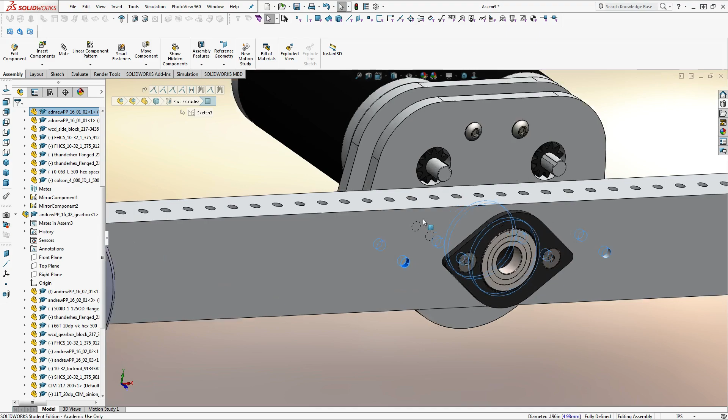What I haven't actually done yet, and probably won't do, sometimes I don't model it, I just do it in real life, is you drill out this face to be a little bit bigger. You use a 3/8" drill bit. You'll machine out the hole to be 0.196, and once you put the tube together, you just drill it out by hand. You can model it, and usually I do, but it is 11:51 at night, and I've had a long day, so I'm not gonna.

So let's see, I'm going to go back up to my assembly, find my front plane, or whatever main plane I want to mirror across. I'll put my gearbox mirrored as well. Nice. So that looks good. I'm going to close all this stuff because I don't need it.

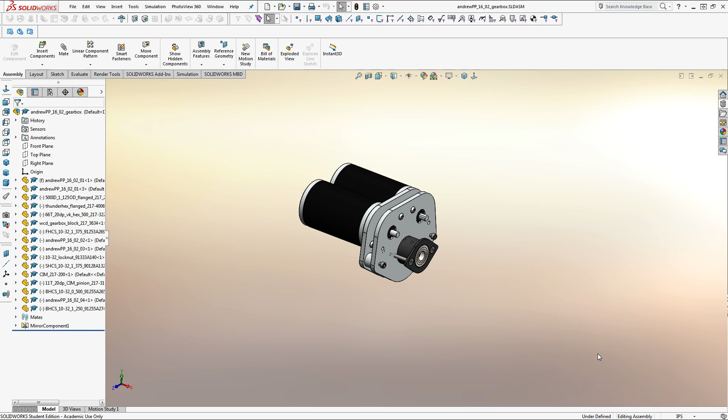I actually haven't looked in a while. I wonder if anyone's actually watching. More importantly, it'll be recorded and everyone can see it later. Is anyone actually watching? I have 5 viewers. What the heck? Do you not have anything better to do? Oh, I mean, you're watching me, so no, you don't. Anywho, so I guess I do have viewers. Hi viewers. I usually make these videos not live. I'll record them, so I'm not used to talking to an audience when I'm doing my SolidWorks stuff.

So just like my other wheels, I'm gonna add a spacer. The reason I put the spacer in is just because those Colsons sometimes don't like butting up against the bearing too much. Go back to my wheels, put my wheel in. The wheel's part of the assembly too. Oops, select the hex. If you notice, I haven't made any shafts yet. I usually save the shafts for last.

But speaking of last, it is about time to do that. So I know how far my hex shaft has to go now, right? So I have to go from this face to the front of that bearing, or rather to right here. According to SolidWorks, that's 3.601 inches. I'm just going to do the real simple way of making a shaft. I know there's technically more efficient ways, but I don't care.

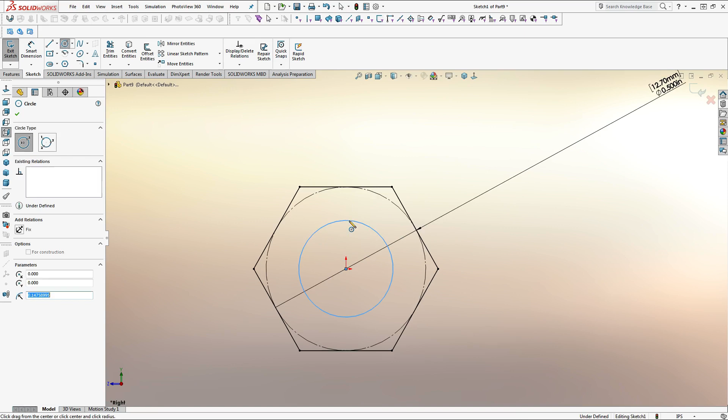Make 0.5. This is Thunderhex, so 12.70 millimeters. And it has a 0.201 hole in the middle. So I'll take that profile and extrude it. So this was 3.601, but for tolerancing and because I have to fit a snap ring at the end, I'm going to add 10 thousandths to every end that I have a snap ring on. Because this is only a single end, I'll add 10 thousandths. If I had a snap ring on either end, I would add 20 thousandths. So plus 0.01.

And now I'll add my snap ring groove. Convert entities for that hole because I want to keep the hole there. It's for a 1/2 inch snap ring groove. It's 0.468. It's going to be 40 thousandths thickness. And the reason I know this number is because I've been to the McMaster site so many times. If you go to the McMaster site and you check on the snap rings, they'll tell you what groove thickness it's supposed to be. So this is 468 diameter, 040 thickness. And usually on the end I'll put 060. Just keep it a clean number. And then that's good for now.

On this end, this goes into that 1/2 inch round bearing. So I'm going to turn that down to 1/2 inch, and that bearing itself is 0.3125 inches.

And because I have a snap ring on the other end, oh wait, I'm gonna sneeze. Sorry about that.

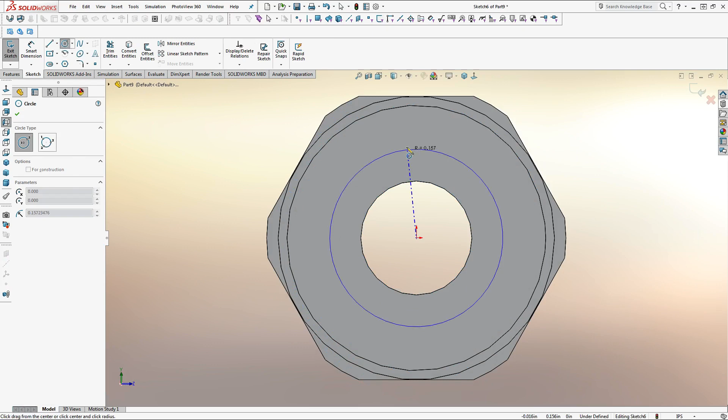3.25, and I'm gonna add 10 thousandths. And I'll do the same thing, 0.468, 40, oh whoopsie daisy. If you're seeing, I'm getting a lot of features here. There are methods of doing this where you can get most of it done in a single revolve. And sometimes I'll do that, sometimes I won't. It's really not that important, especially for such a simple shaft like this. For more complex shafts, I'll definitely do it.

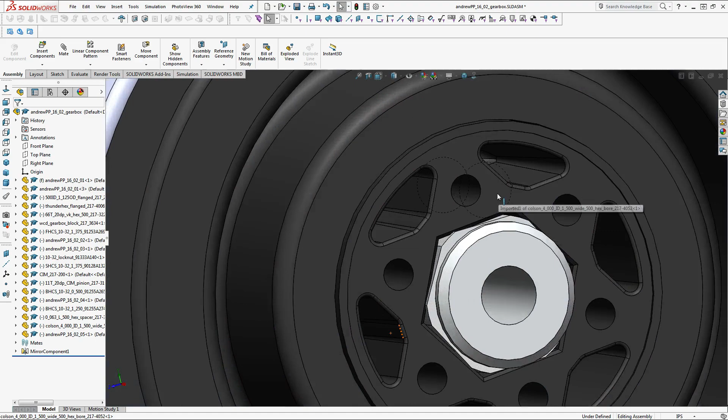I'll chamfer both edges because it looks nicer and because it makes it easier to get the snap ring on. And this is my drive shaft. Oh, not in there. Gearbox. Nice. So I'm going to position this by putting it against the bearing because that is where technically my tolerancing is. And because it's Thunder Hex, it's mostly round. If I just find a round surface to mate it to that's in line, so like that gear nub right there, that works. And then for my sanity, I'm just going to make these parallel.

And there you go. I recently added snap rings to my library, so y'all should be using these as well. When you bring in a snap ring, it will give you some number and some number underscore GRV. GRV just stands for groove. Use the groove one. See, it opens it up a little, so it simulates being on a groove, which is coincidentally the only place we'd use snap rings. Like we wouldn't have a snap ring and just not have it on a groove. So that works nicely. And I'll put one on the other end as well. Nice.

See, I think for the most part, the gearbox is done. No other shafts to make, no other spacers. I could pocket it, but I'm not going to do that in this video. We're running long enough as it is. So that's good. We'll call that a day.

No, wait. I'm dumb. I apologize for all these mistakes. Normally I don't do this, but like I said, it's been a long day. I forgot. Also, I spelled something adnrew. Oh wow, I am so out of it right now. That's fine. Let me explain what I did wrong.

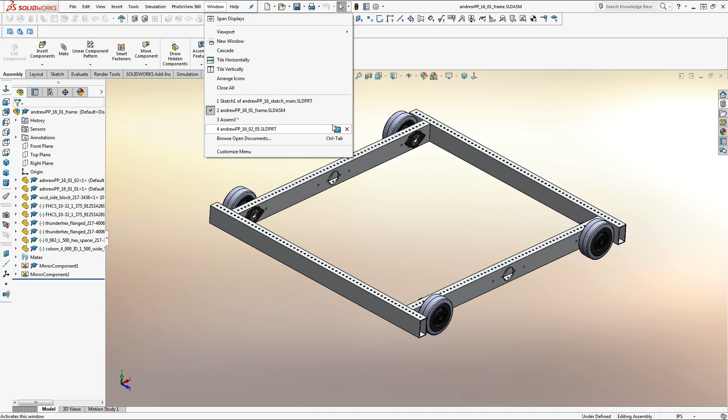You're going to have sprockets on either side of these. I didn't put the sprockets in. It's a really simple fix, don't get me wrong.

Just goes to show how important sleep is, kids. And I know if you're one of my students, you don't get enough of it.

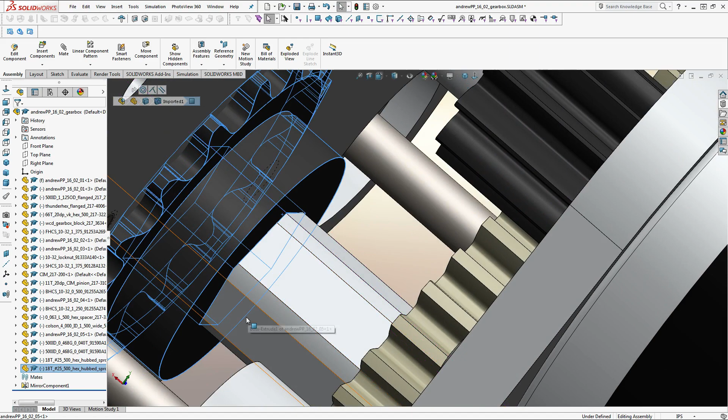So what I'll do, I put the sprockets in here, 25 sprockets, hub, 18 tooth. Pull another one out there. Make it concentric. Put this face up to that face. Oops, make the two faces parallel, if it'll let me. Alright, let's make it concentric with the shaft. Just because, even though it does not matter, because you will not see it at all, for my peace of mind. There. And we're going to put this end right up against the gear. And that front face there is going to be 3/16 away from the front there, 0.1875.

So all we're going to do with this, we can go to our custom spacer. I'm going to add 0.1875. Save that. I gotta remeasure all these now. How far away is this? That is 0.91. So I'll take that number, add 0.91. And the distance from here to here is 1.408. 1.408.

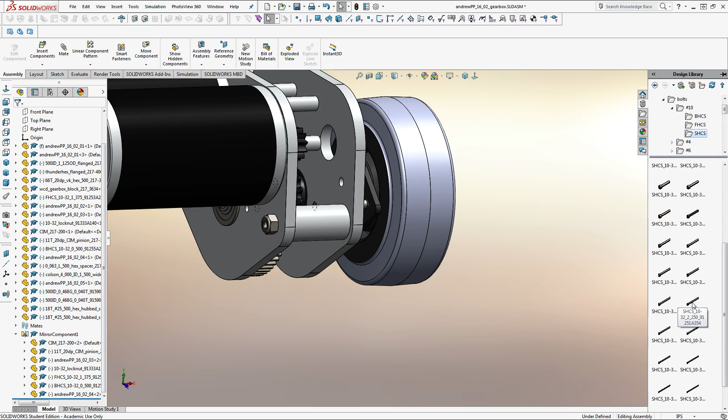I have to use different bolts here now because these aren't going to work. I have to use a different one here too. Well, this is why we do the math, I suppose. See, that's 2.133, so I can use 2 3/16 or 2 1/4. Bolt. Number 10 socket head cap screw. 2 1/4. Distance 0.125. That's good. And what's that to that is 1.908. So if I add 1/4. So actually I can just use 1 1/4 for that, or 2 1/4 again. Sorry.

Yeah, that's good. So I'll go back to my mirror and add those in. Alright, that looks cleaner. For some reason it was looking suspiciously small earlier. I just didn't think of it. Much nicer. Cool. We'll save that up.

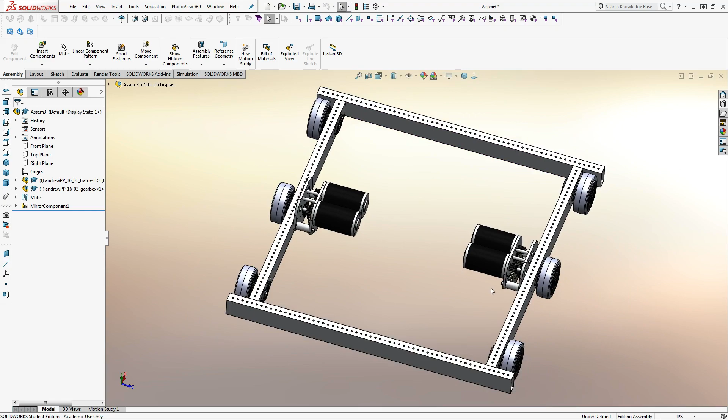Alright, now we'll get to the fun stuff. Implying it wasn't all fun to begin with. Get the sprockets in, make a belly pan, and then my favorite part, we call it a night.

So we'll pull a sprocket over here, make it concentric with the bearing block, get the inner face and make that coincident with the inner face of the aligning sprocket. We'll do the same thing, pull it over here, but we're going to flip the sprocket around just so we can save some space. And then make that face coincident with this face.

Nice. And again, just for me. But for the CAD, it doesn't matter at all. And like when you're doing CAD, it shouldn't matter. The only reason I put that in is because when I do renders, I want it to look nice.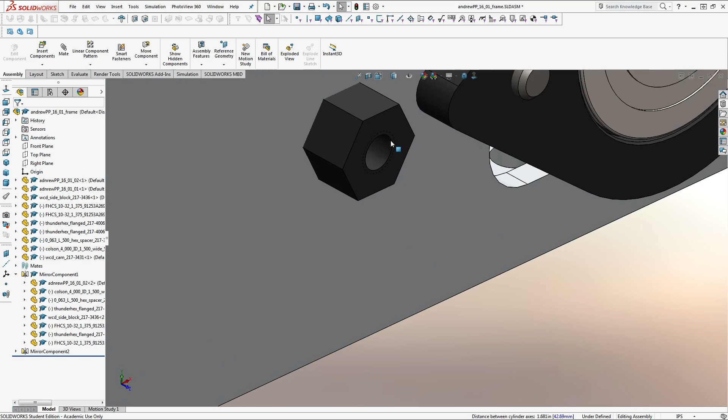So I'm going to go back to my frame now and put my tensioner cams in. So we go to my WCD folder, take out WCD cam. So the way this works, you spin it and it contacts this and it pushes it aside. I'm just going to get a little close and that'll work.

And I believe it uses 1 1/4 or 1 3/8 or 1 1/2. That's wrong. Go to button head bolt 10-32, 1 1/2. I need to tomorrow get that 1 3/8. Alright, that looks good. Important thing to note. Oh, I put it in the wrong one. Should have put it in that one. I got lazy. That's whatever.

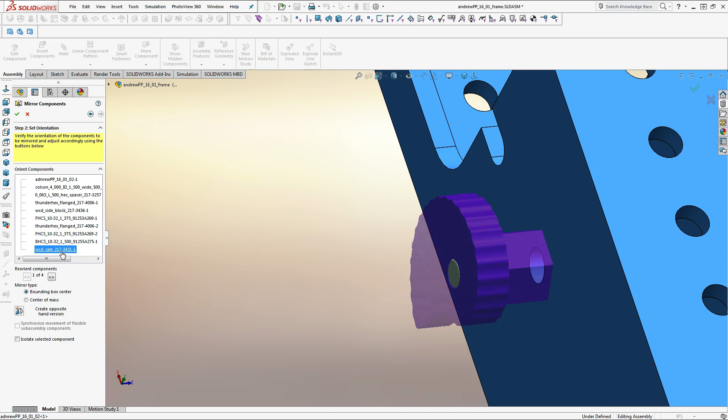Sometimes when you mirror stuff, it doesn't always work out right. So you go to the orient screen to look at the different views of it. Let's see. I want WCD cam. Click this little arrow. You can choose the different views. Unfortunately, it's not being nice to me with this one. So, where'd it go? Did it even mirror it? No? Okay, that's weird.

Drag out a new one. I'll mirror the bolt because the bolt works nicely. Sometimes it just does not want to deal with the cam, getting it in the right position. See if it'll do these ones. I bet it'll do one of them right, and the other one it'll just complain about. Yeah, it's not liking that one. This one, nope, not liking it either. But can I fix them? Let's find out.

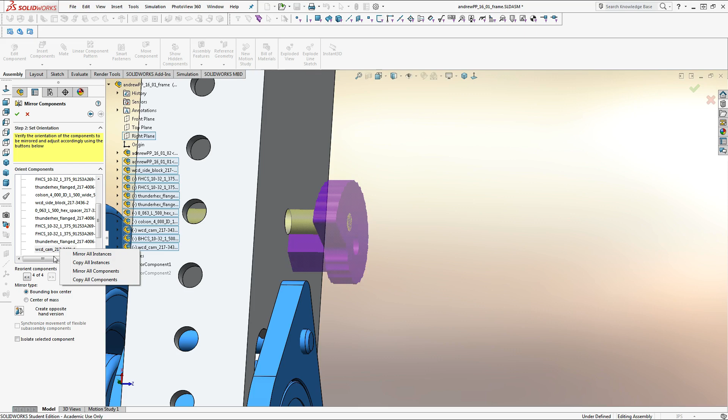Let's see, WCD cam. Nope, nope, nope. Not gonna like that one. What about the other one, WCD cam? You gonna play fair for me on this one? Nope, the hole's in the wrong spot. Nope. Alright, it doesn't want to play nice. I'll do these by hand. I hate doing these by hand, but whatever.

Whoops. Rotate it till it's approximately over there. Alright, that looks good. So we got the cams in. Go back over here. Let's see.

I'm going to leave out a little bit of detail work just because it's literally past midnight and I started this at like 10:45. So I've been doing this for a little over an hour and a half. So detail work I'm going to leave out. I'm not going to put spacers right here, even though you should. I'm not going to put the drive shafts in. But I mean, I'm pretty sure students will be aware you need to put a shaft in between your wheels. You need to put a spacer in there, have a snap ring on either end.

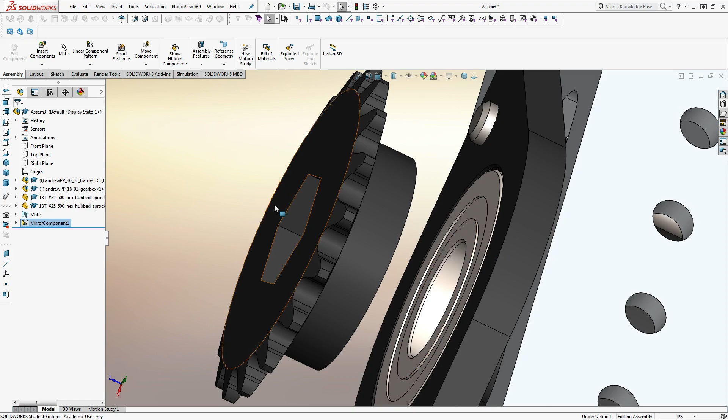And then last but not least, the belly pan. And this is probably a part, if anything, you should pay attention to. And figure out the dimensions. I know it should be 30 over here by 26 over here. Yeah. So I know the distance between the outer of these two walls and the outer of those two walls. So it's going to be 30 by 26.

Put this on the top plane. Start with a rectangle. I'm going to make it my outer size, 30 by 26. I'm just going to right away extrude that by 1/8 of an inch. My belly pan is going to be 1/8 of an inch thick. I'm going to do that cornering technique. So I want it to be 1/2 inch off either end, but I have nothing to compare it to, so I do have to dimension one of them at least 1/2 inch. And then 0.196 for my hole.

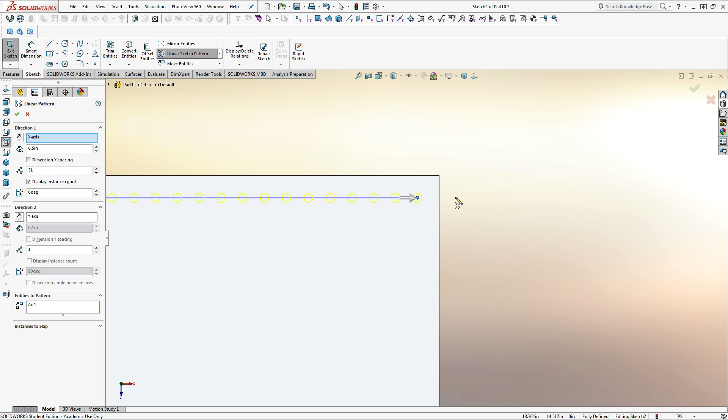And normally I try to avoid sketch patterns. SolidWorks doesn't like them too much, but I haven't found a better way to do this. So I just literally dimension it out. I could probably do, no, wait, nope, that wouldn't work. Yeah, so this is probably the best way to do it. Dimension it out, and then it's blue because it's undefined. What you gotta do is tell it that yes, SolidWorks, I want this to stay horizontal, and I want the distance between that to be 1/2 inch, and it's pretty good.

Make a line right there because I'll mirror across it. I'll do a linear sketch pattern again, this time with the first hole and the other hole. I'll turn my quantity on the X down to 0 or down to 1. I'll put it up on Y, flip it around, make it 0.5, all that pretty stuff.

And I'll keep increasing the instance count. And I'll do the same thing. Tell SolidWorks, yes, I want them vertical, and yes, I want them 1/2 inch apart, even though I already told you that. I didn't click dimension X or Y spacing, which is why I have to do that. Go to mirror, and I'll select everything except for the middle ones. You can still select the middle ones, but it's redundant, so it doesn't matter.

Mirrored across, and then cut through all the way up. Now I get to chunk out the inside. We're going to offset the entire thing by 3/4, not 1 inch, even though it's a 1-inch tube. We're actually going to cut in a 1/4 inch onto either side of the tube because that's extra material we don't need. We're going to make a diagonal line, and we're going to connect the vertical and horizontal lines to the diagonal.

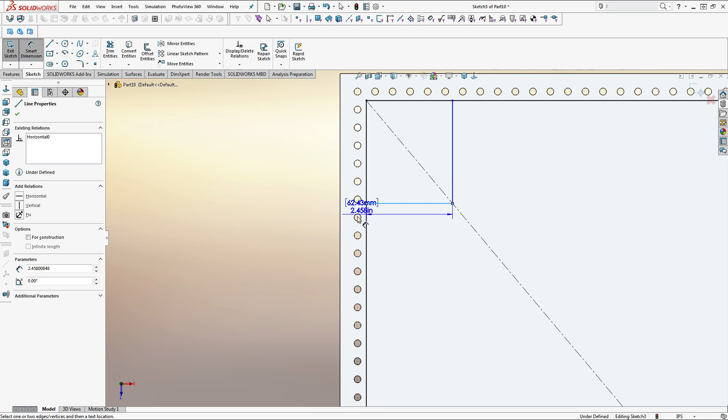Let's see, this is 24.5, this is 28.5. So I'm going to take this and make my X the 24.5 and divide it by the number of diamond patterns I want. 7's usually a good number for this size. If your belly pan gets bigger, you might want to try 8. And put another diagonal here. And here's what I'm going to do.

I'll click O, go to offset. I want to have a 3/16 inch total strand width, so I'll go 3/32 to 0.09375. Select both of those and bidirectionally offset them. And I will extrude cut. And I cut out these 4 little triangles. And I'll use the magic of linear patterns to do the rest for me.

So first I'll click on my X. It'll say up to reference, but I want spacing and instances now. My distance is going to be equal to that 24.5 divided by 7. Oh, whoops-a-daisy. Divided by 7. You can see it's spaced out evenly, and my instance count is going to be 7.

Likewise, direction 2, do the same thing. I had the 28.5. I'll divide that by 7. It'll be some weird number, but I don't care. And I'll make my instance count 7. So when I click enter, it gives me this nice little diamond pattern.

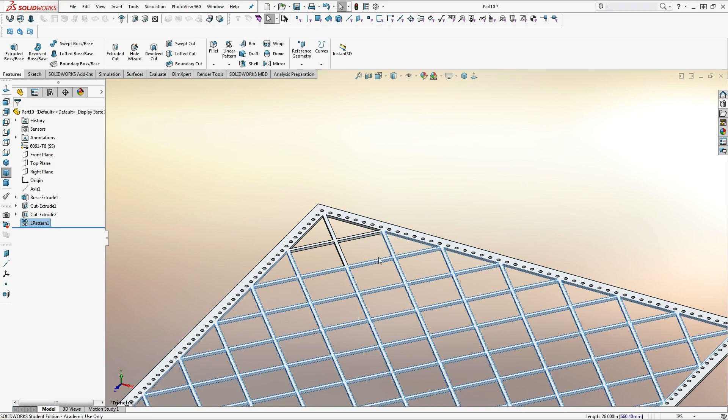Before I finish that up, though, I'm going to make a slot for the gearbox, so that you can take it out if you need to. So my gearbox is in this location, it's horizontal to the origin. If I go back to my assembly, let's see. How wide is this? At its widest point, I'll go from there to there. Measure, and I don't want center, I want maximum distance, and this is, you're joking, 5.5.

Okay. I'm pretty sure that's what I have in my sketch too. That is hilarious. I did not do that on purpose, folks, I swear.

I'll make my area a little bigger though, just so I can give myself some leeway. I'm going to say 6 inch. And what's my distance? From there to there is 6.385. I'm curious what I put in my sketch. Just 6, okay. I underestimated this. I forgot I had to put sprockets in. 6.385, so I'm going to call that 6.5. Or 6.5, I have to add 1 inch because I'm counting for the tube. 7.5, it's not bad.

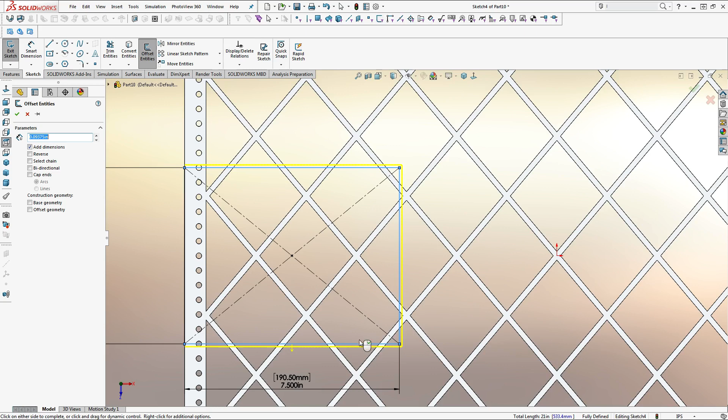So I'm going to offset these now to the outside by 3/16 of an inch. And actually, to make my life easier, I'm just going to delete this dimension. I'm going to say it's going to line up right where this cusp is. Because what's going to happen is I'm going to add material in here. And when I try and fill it, I'm going to fill it here and fill it there. And that's going to be too close to each other.

I'm just going to move that out a little bit. It'll make my life much easier. So I'm going to be adding material in here. I don't want it to extend over into this area. So I'm just going to go a line down to there.

And a line down to there. I'm going to select the area and extrude up to surface, up to the other surface, or you can just go blind by 1/8, but up to surface in case I need to change my thickness later. Go back into here and create a rectangle, and I'm going to make it collinear with all the sides. So what that's going to do is it's going to select the entire area without having to redo any of the math or dimensions.

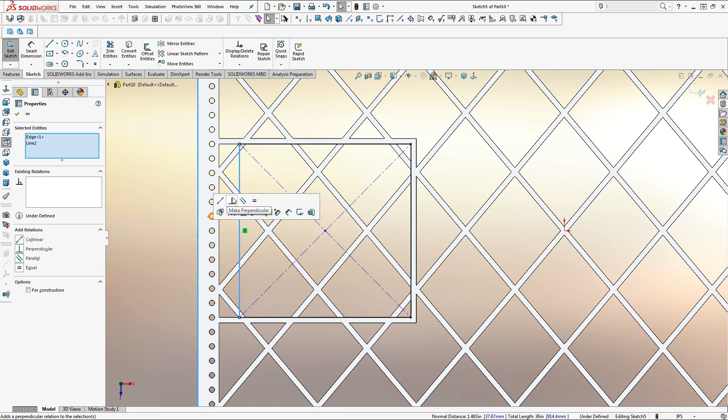Oops, there it is. Collinear to there, so we'll cut that out. Whoops-a-daisy. I didn't mean to do that. Or I did, but rather what I ended up doing was this right here. I did not want to do that. I try and avoid having half holes. Easy way to avoid that is, I could just fill it in if I wanted to. But there's an easier way to avoid that, and that's just by making it so this line doesn't intersect anything. So I'll just add another 1/2 inch to that. Yep, and that fixes the problem altogether.

Next thing, let's see, I will mirror across the right plane. Whoops, not shell, mirror. I'm going to do my boss extrude and my cut extrude. That gets both right there. Now I'm going to cut out the outside bit because I don't need all that material on the outside. Remember how I said, even though my tube's 1 inch diameter or 1 inch wide, I was only going to go 3/4 offset. Well, now I'm going to go 1/4 inch offset from there, because that's just weight I don't need, right?

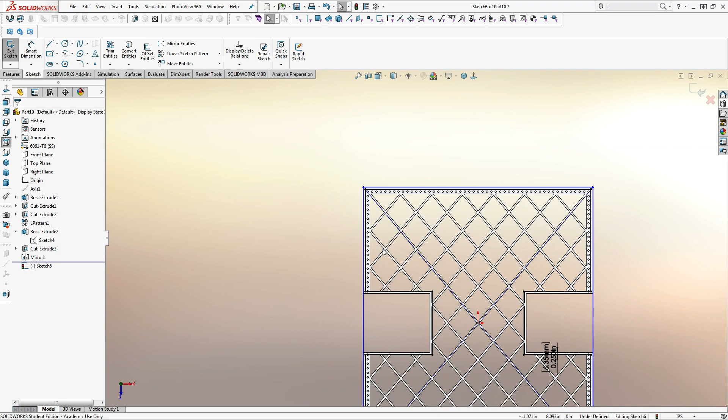Oh, so my SolidWorks does this weird thing sometimes where if you offset entities, it'll deselect the center position of previous sketches. So what it's doing is it thinks this center is no longer there, or if it's not there, it doesn't think that this is contacting there. So I'll just reselect that, and that's fine. So I'm going to cut all this excess material out because that is just waste that I don't want and I don't need. Oh wait, now that is a problem. I do not want that.

What I'll have to do is I have to offset the line itself. Let's select chain. When I offset the plate, it tried to go off on the inside here too, which is not what I want. There it goes. We'll remove all that. Fillet the outside. All the outside corners should be about 1/4. I'll use connected to start loop.

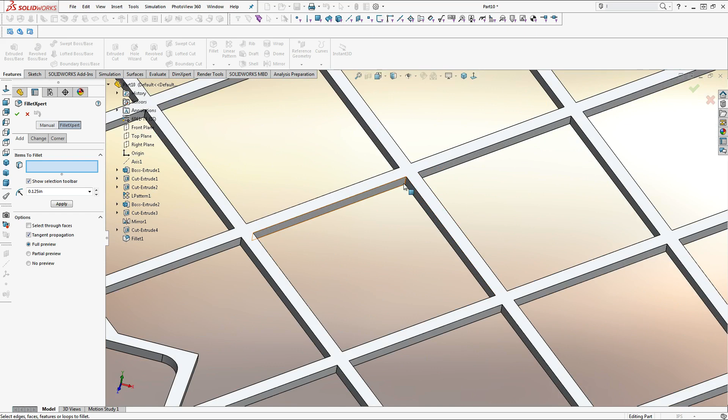The inside, normally I would hold off on filleting the inside until I put all my electronics on, but this is just practice for all y'all. So this is going to be an 1/8 inch fillet on the inside. Usually I can just do the second one from the inside to connect it to internal start loops, 411 edges. Sounds about right. Give it a second. Imagine having to select all these by hand. I used to do that before I knew FilletXpert existed. Alright, and that's my belly pan.

I don't want to save it in Gearbox. I want it to go in frame. Alright, actually, not my assemblies. Go back to the frame subassembly. I want to put as much in the subassemblies as possible. I don't want to put much in my main assembly. The main assembly should just be subassemblies. So now with my belly pan, let's see. I saved that as andrewPP as well. That's gonna bug me. It's whatever.

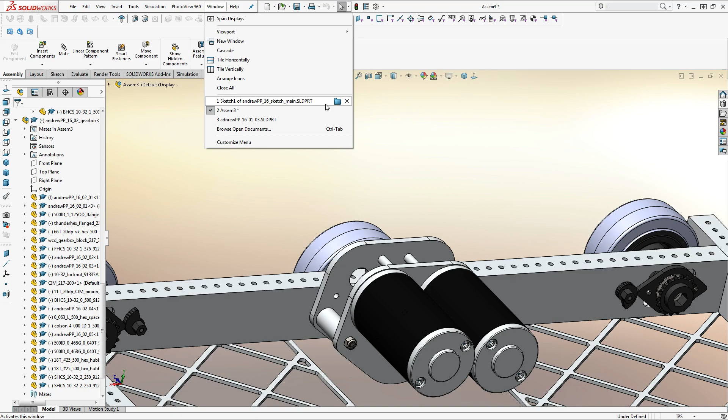I have the planes that I purposely put in the center so I can align the planes without aligning to a specific hole. It makes my life easier. And I'll just make the top plane of that coincident with the bottom plane of that. You can see how it lines up nice and perfect. And it has those slots for my gearboxes too. Okay, I'll save my frame. I can actually probably close out of that now. Close out of my sketch. And here it is, in general, my West Coast Drive.

Let me see. Chain's gonna go from there to there, from there to there. There's a way I would model chain, but it's 12:20 in the morning, which I know isn't too late, but I've been doing this since technically yesterday, so I don't want to make this go any longer than I have to. So yeah, this is it. I'm going to save this as Andrew PP 16 test WCD. I'll upload it to GrabCAD so y'all can see it, and I'll try getting this video uploaded overnight.